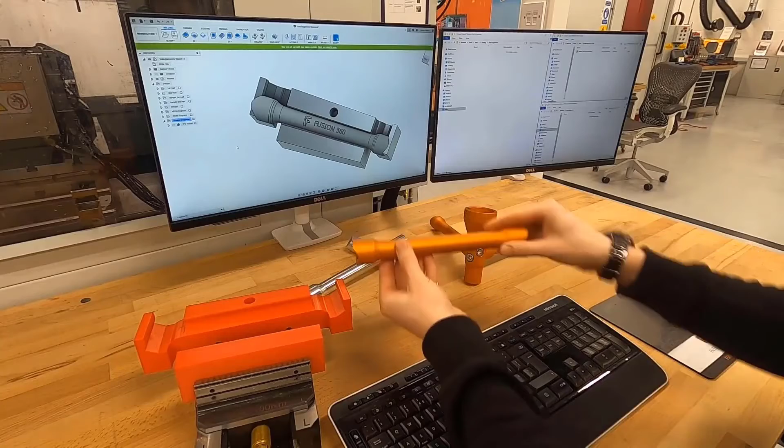Hi everyone, today we're going to take a look at part alignment in Fusion 360. We have made these support beams and sent them out for anodizing. Now they need some engraving on the top surface.

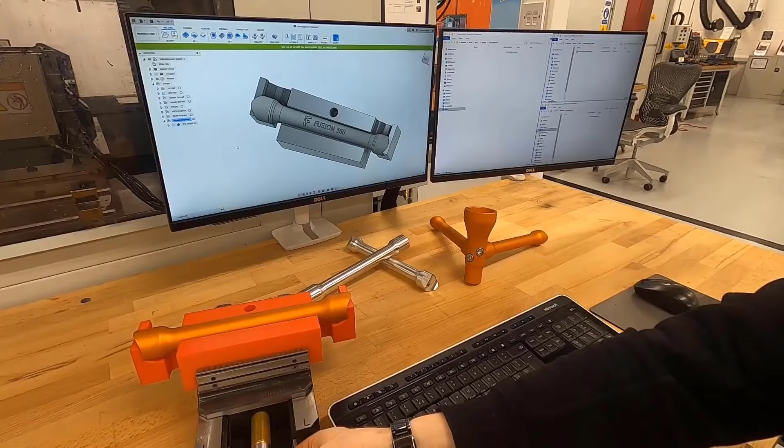I have 3D printed a set of soft jaws to hold the part in the correct orientation along its axis, but unfortunately the location in the other directions is not going to be accurate enough for our small 0.1mm depth of cut on the engraving pass. We're going to use the top surface here as our Z datum, this hole as our X and Y, and then from here we will use our part alignment to improve this location on the machine.

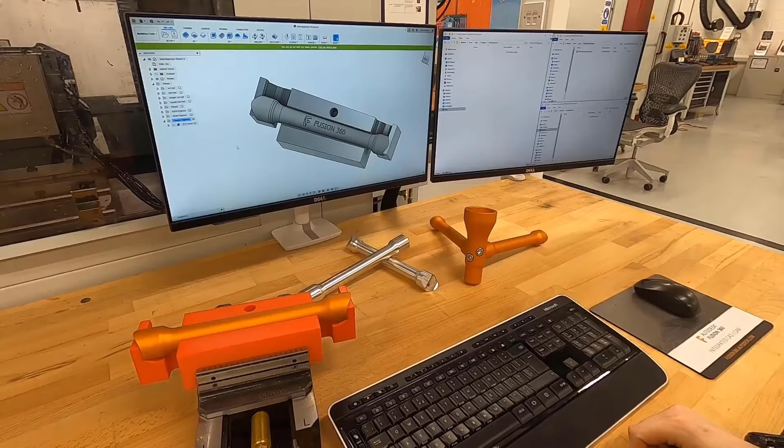The same principles apply if you're trying to balance stock on a forging, casting or 3D printed part, or perhaps trying to align a complex part back on our milling machine for further work, like a mould or die tool for repair or modification. To traditionally align this part, I would have to take a series of measurements across the top and keep adjusting the part until it sits correctly. Varying in the skill of the machinist, this can take a considerable amount of time.

Now we have to take measurements across the face of the part and keep adjusting my C-axis until the part is aligned along the X-axis. As you can see, this is a lengthy process and there's lots of room for error. So now we're going to take a look at how we can automate this inside of Fusion 360.

Here we have the part assembled into our soft jaws. Let's make a part alignment from the probing tab. We have three main fitting types, 3, 4 and 5 axis. 3 axis will let the part translate across all three of the orthogonal axes.

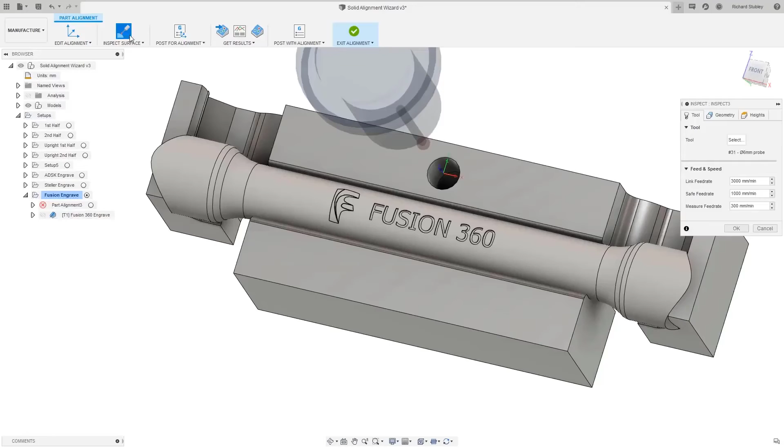4 axis will not only do the translation in the 3 axes, but also allows you to select one additional rotational axis. And 5 axis will allow us to rotate about 2 axes and get a full alignment. Now remember, even if you have a 5 axis machine, you can still select 3 axis if that's what you want on your part. Let's place some inspection points on our part.

We're going to try and have a good spread across the component and restrict the 6 degrees of freedom. So I'm going to try and choose points with a good distribution across the surface. Imagine you had a square block of material. You wouldn't want all the points on the top. You'd want them spread across all the faces to give a good fit on the alignment.

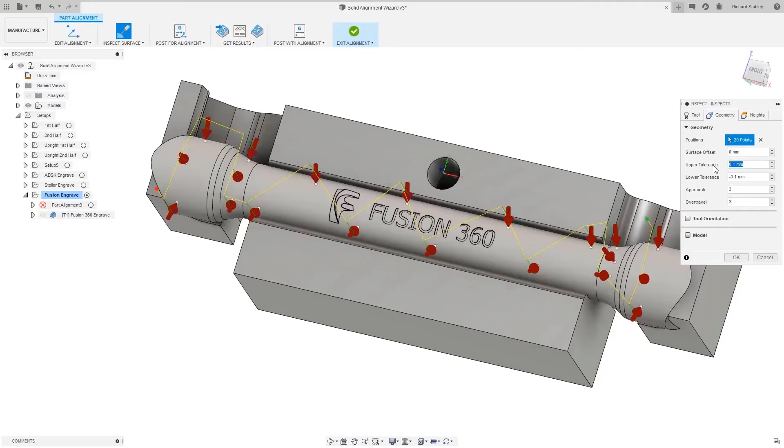To make things run a bit smoother and more efficient, let's drop the approach and over travel down to 3mm. Because all of this is for our trace toolpath that has a depth of cut at 0.1, I'm going to tighten up my tolerances. And finally, just lower that retract height. We now need to post-process the inspection toolpath for alignment. This creates an NC program, so just change the settings here as you normally would for creating NC code.

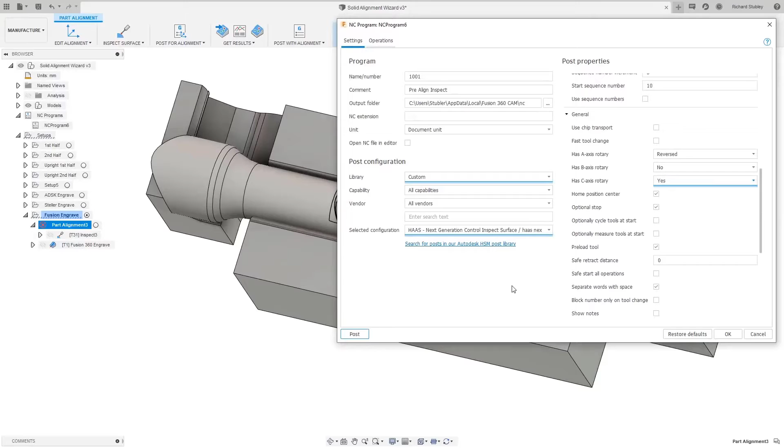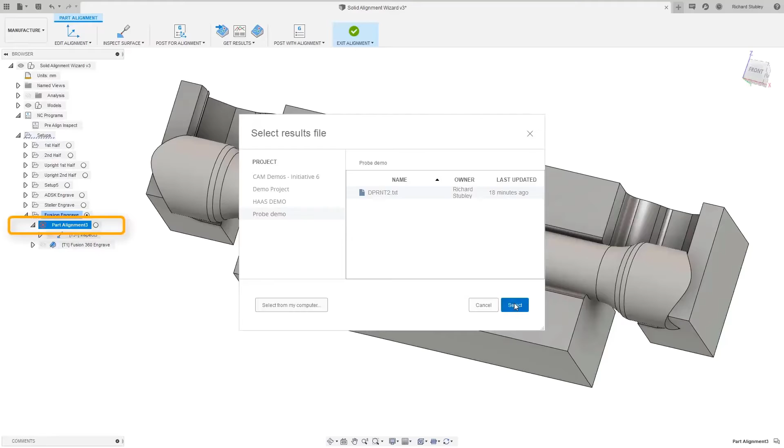Now we have our NC code, let's go over to our machine and run the program. We're now executing our probing program on the machine, and we will retrieve the results file once that's finished. So we have our results file from the controller and are now ready to import them back into Fusion. Notice the red cross on the part alignment folder is now a green tick. This shows that the part alignment has been calculated correctly.

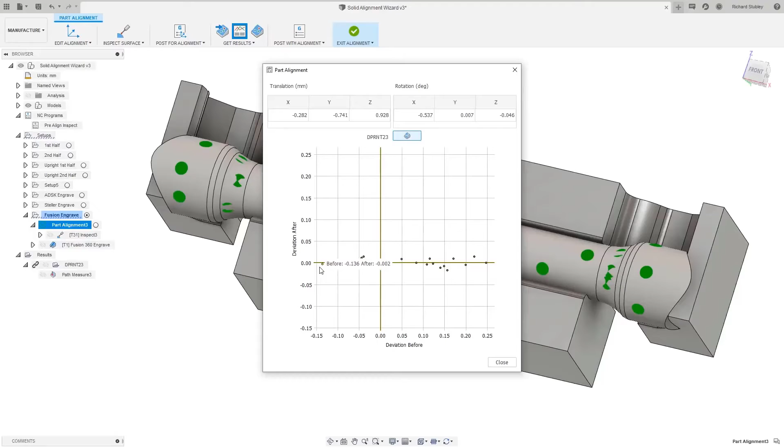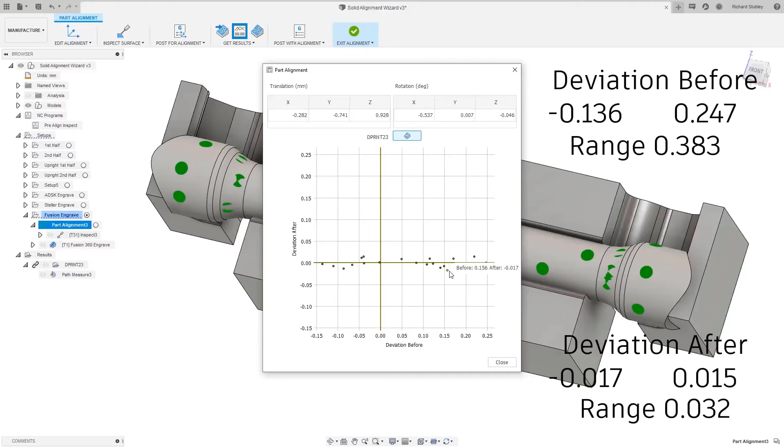So, for our results, we can see that at the two extremes of the x-axis, we have negative 0.136 and positive 0.247. After the alignment along the y-axis, we have the extremes of negative 0.017 and positive 0.015. That's quite a big improvement.

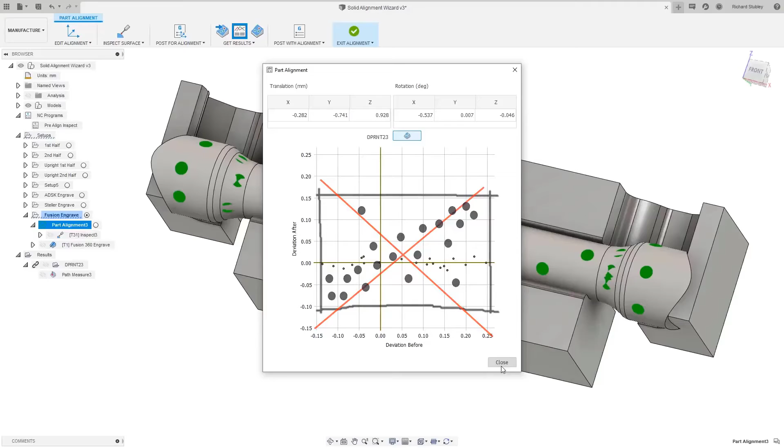I like to think of a bounding box around these points. The wider the rectangle, the worse the points were, and the shorter the rectangle, the better the alignment has worked. If you see a square, then we have a problem. This means that the points were just as bad after the alignment as before. There is another way to see this result, the same as the normal inspect surface table, but here we have an additional checkbox where we can flip the points before and after the alignment to see a comparison.

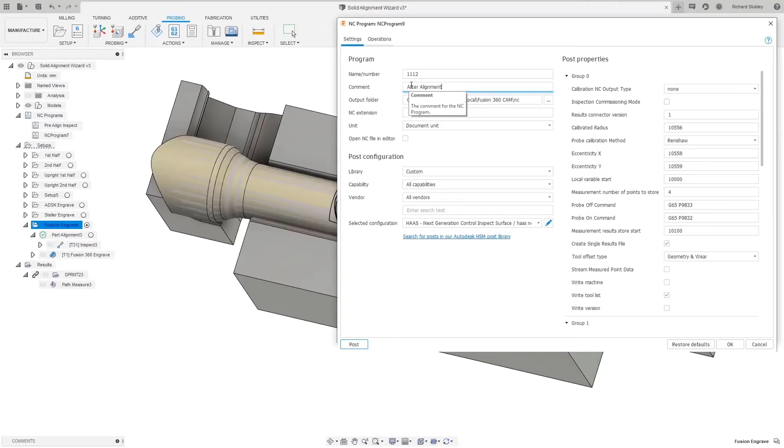Now that we are happy with the alignment, we can post out all the toolpaths in this setup with the alignment applied. Again, set up your NC program as you normally would, and before we hit OK, look at the operations table. Here we only have the trace operation selected, as Fusion knows we do not need to run the inspection path again.

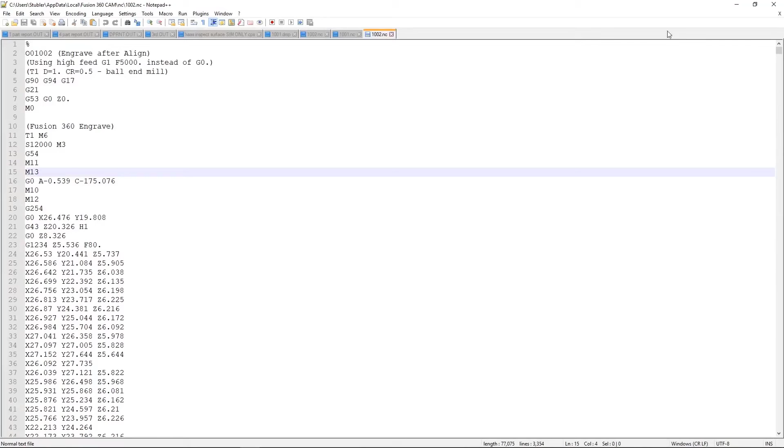Having a look at our NC code, you can see our 3-axis toolpath is now a 3+2 toolpath. So what's happened is Fusion has had a look at the transformation required and adjusted our toolpath to suit. Again, over to the machine and let's run the NC code.

You may be thinking that was a huge C movement and our part can't be that far out, but what you are seeing is the result of 3 axes in CAD being transformed onto the 2 axes the machine has. So a tiny movement in B results in a large movement about C and A.

We have now fully engraved our part nice and evenly across the surface. With part alignment, you can have the confidence your toolpath will be in the correct place every time.